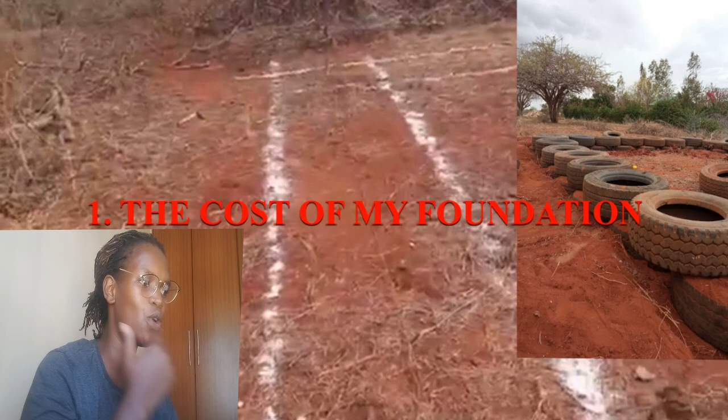And so for the foundation, the first thing that I used was the tires. So for the tires, it was 28.4 meters, that was the perimeter of the wall. So you take the 8.2, you take the 6, you multiply by 2 so that you can calculate for all the sides, okay? And then remember the diameter for one tire, the one that I was doing, was 900 to 1 meter. So for calculation purposes, I'm going to be using 1 meter, okay?

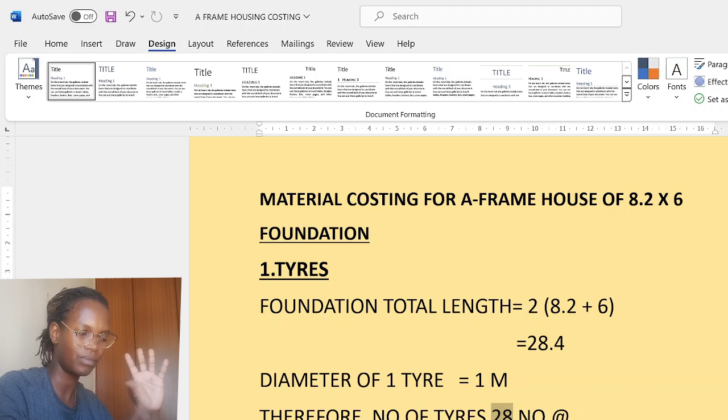And that is how tires have an advantage over masonry, because if you're doing masonry, the width itself is around 400. So you need 2.5 stones to do the equivalent of one tire, okay? And something else about the tires, the tires are around 400 millimeters high, if I remember correctly. I'll confirm that, because I only used 2 courses.

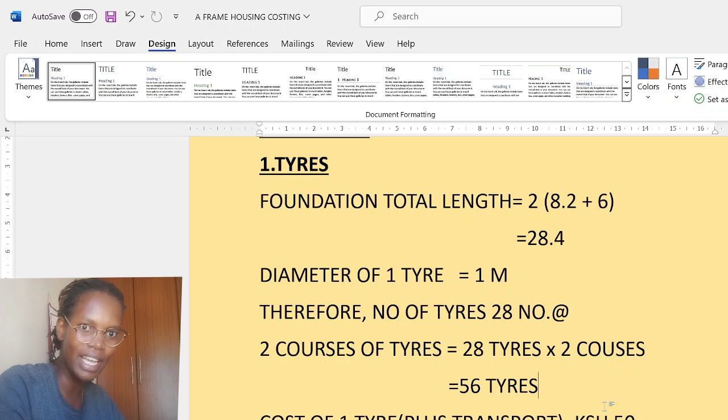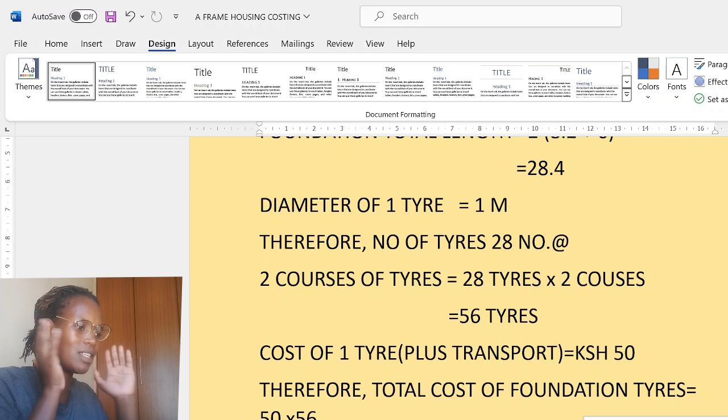So generally, without all the stories, once I calculated, I had 28 tires on the first course, and then the second course, 28, because I did 2 courses, and that was an equivalent of 56 tires. So the thing here is, don't go for the best tires. Remember, we just need the circumference. We need the tires as they are, we don't need them new. So I was buying them for 50 bob, plus the transport to the site. And so it's 50 times 56.

So the cost for my foundation was 2,800. Guys, I'm not lying. You can count, go ask around, 2,800. So in your case, if your tires are around 200, do the costing, because if you're doing masonry, that is mawe ya kawaida hii ndarugo, you'll be buying a stone at around 70, okay? So you need 2.5, and because the tires are this thick, you only need 2 courses.

You need 2 courses of tires. For the masonry, the equivalent will be around 4 courses, okay? So keep that in mind, plus the cement and everything. So as I'm doing this video, I just want you to correlate it to the standard ways of doing normal foundations, okay?

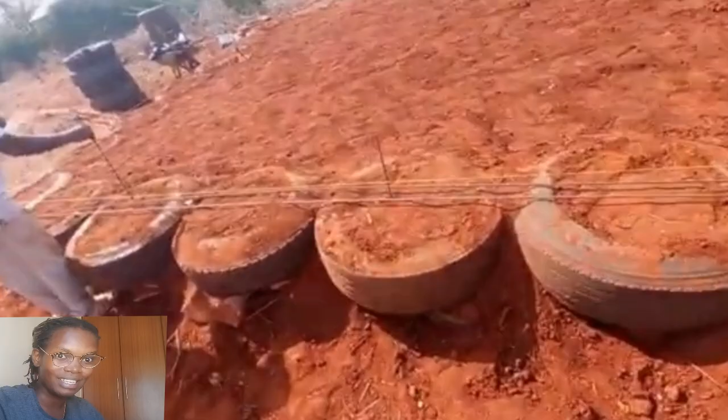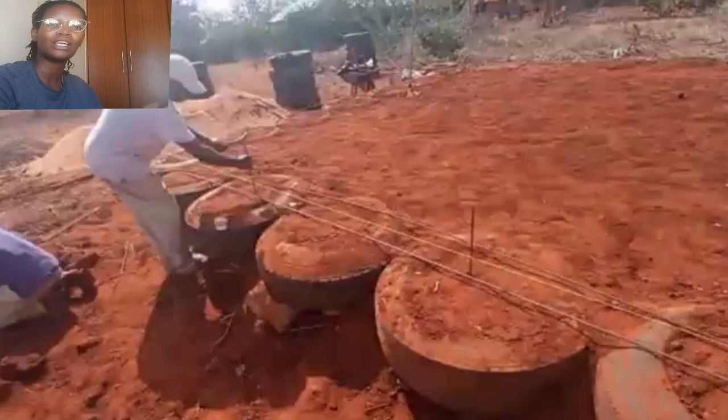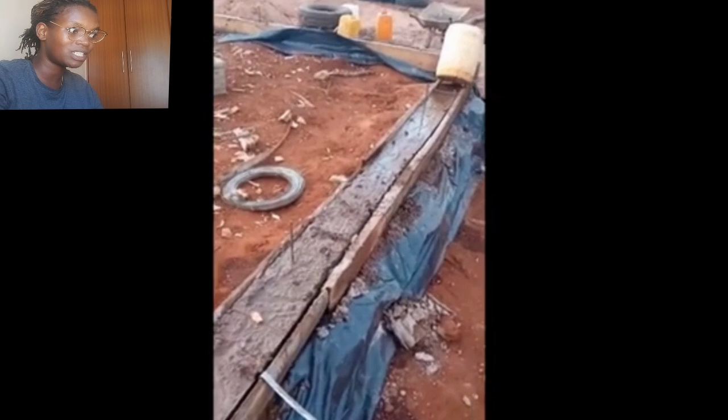And before I move forward, the beauty of doing a foundation using the tires was because, first of all, if I was doing the kawaida way, once you've dug the trenches, you'd need to put the concrete bedding, you'd need to put the rebar ni zile D8, but these tires zenye ziko na chuma on the sides, and they are round and compact, so you just get the levels and you're good to go. So guys, that's how my cost for the foundation was 2,800. Remember, I'm not filling it with anything.

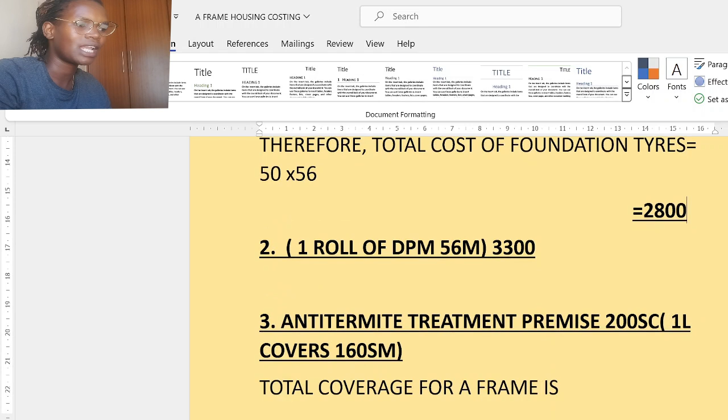So nothing is going to waste, okay? And then I just bought one roll of DPM. DPM ni ile karatasi. It was 3,300, that's how much I got it for. And then for this point, initially in my project I used Gladiator, and I bought it for around 2,800.

But saizi, if you're doing it for your own costs, I would advise you go for Premise. Premise is the latest anti-termite treatment out there, and it's the same manufacturers who used to do the Gladiator, but Gladiator has so many fakes right now, so just go with Premise. Premise is expensive, but guys, I always advise when doing this type of houses, especially because I was using wood on top, don't gamble with the anti-termite treatment.

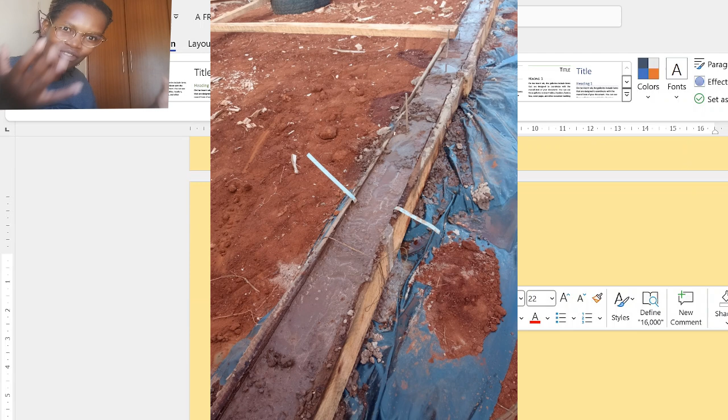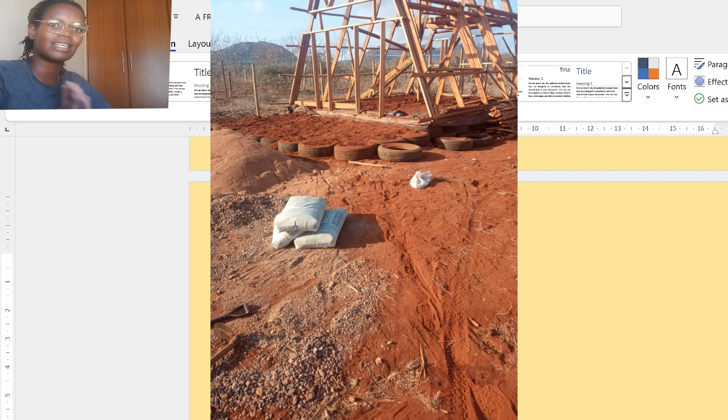So for the Premise, 1 liter covers around 160 square meters. So for my house, I would have used 16,000. That is not what I used, but for the sake of this calculation, in case you have an A-frame of this same size, that is what you're going to be using, around 16,000 shillings for the Premise. That is the termite control, okay?

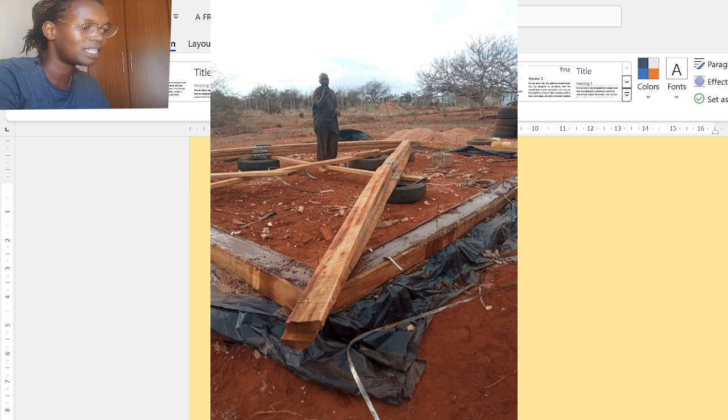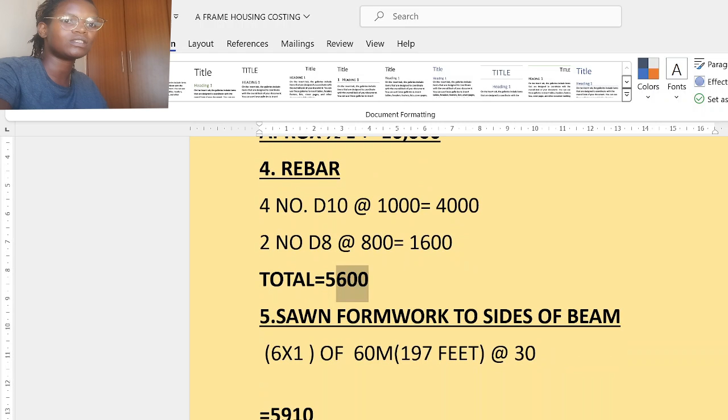So for the rebar, ni hizo chuma, I did 4 number D10. I was buying them at around 1,000, so 4,000. Yes, that is for the bond beam. And then I was doing 2 number D8. So I was doing D8 at around 800, so it was 1,600. So the total for the rebar was 5,600.

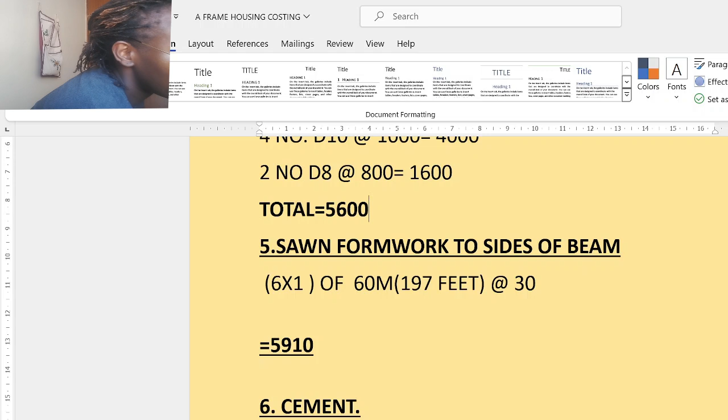And then sawn formwork, ni hizo mbao za sides za kushikilia tu hiyo beam. That is the only sawn formwork that I needed. Okay, so I was using 6x1 timber. I was buying them at around 30 bob. It's 5,910.

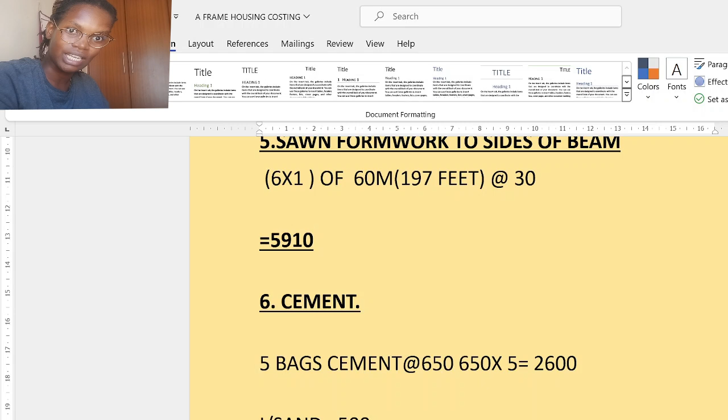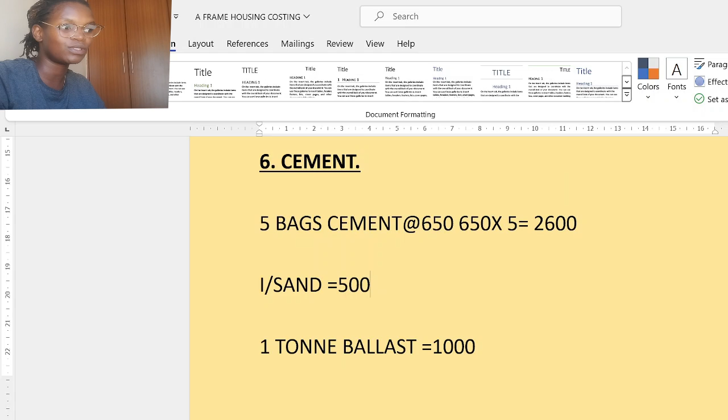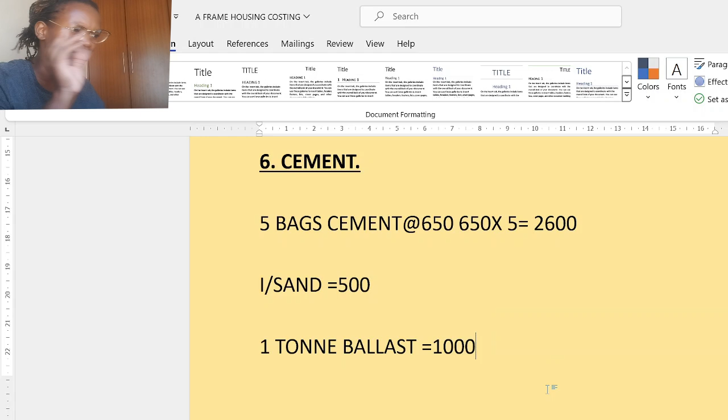Okay, and then cement for just doing that bond beam. I used 5 bags of cement. I used a half ton of sand, that was 500. Okay, 5 bags of cement at 650. Right now I think it's around 700 to 750 depending on where you're from, but for me it was 2,600. Quarter ton sand, that was 500. A ton of ballast was around, is it 1,000? Give or take 1,000, I can't remember. So the total was 4,100.

Okay, and then for the floor, remember the soil. It's very important to understand the type of soil composition that you have. Our soil in Voi has a lot of sediments. It's like murram blinding. So murram blinding, once you compact it with water, as you do when you're compacting the roads, it becomes firm. In fact, you're forming a rock naturally. You know how rocks are formed? It's called sediments, and then you stamp on them.

But that was all I needed. What I'm trying to emphasize, I didn't do anything. I just had some murram that I dug when I was doing the toilet, the pit latrine, which I hope you guys have watched. I also did my outlaw septic tank, I put the toilet on top, and I used tires. So it's a septic tank, but you have the toilet on top. I think I'll be doing a more thorough video, but if you haven't looked at my YouTube shorts, there's a way I explained how I did that. So once I dug, that is what I used to fill in the house.

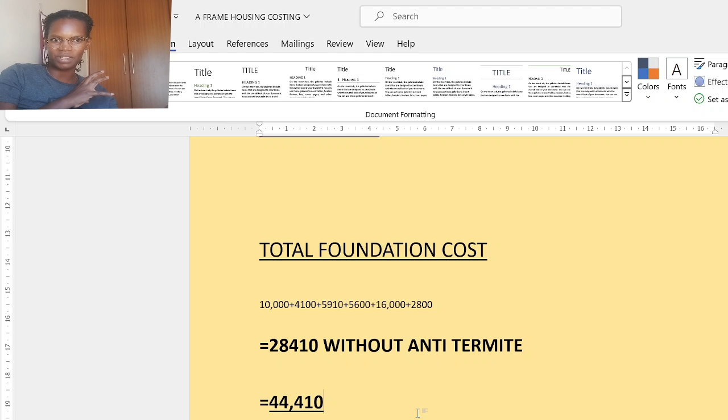So because of that, if you're interested in becoming part of the cob ni matope, wacha niache kuita kwa wazungu wanaita cob, you know, wattle and daub. But sasa sisi ni zile nyumba za matope za kukandika, but there is a science to it. Hukandiki tu, there is a reason pia. Us wenye tumelelewa kwa nyumba za matope, once you go into the modern aspect of it, you don't want to go back there because the finishes ilikuwa ish. But what if you could incorporate those traditional methods, add some science to it by understanding why you should do this instead of this? So it's a mishmash of the traditional and the modern way of building.

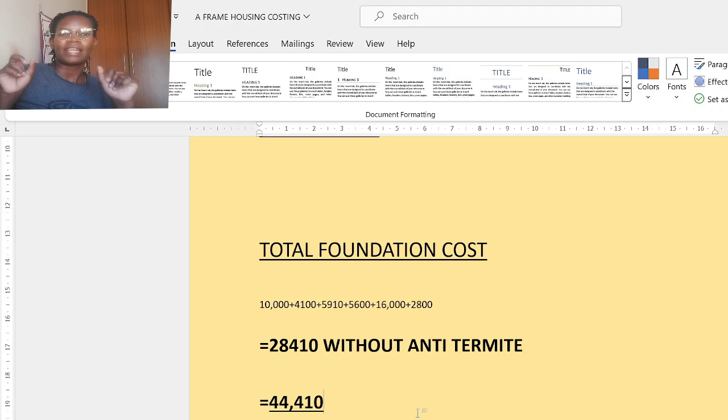So guys, long story short, there's going to be a workshop, and if you're interested kindly write in the comments below. Let me see if there's going to be some bit of quorum.

Okay, so guys, that's the cost of my foundation.